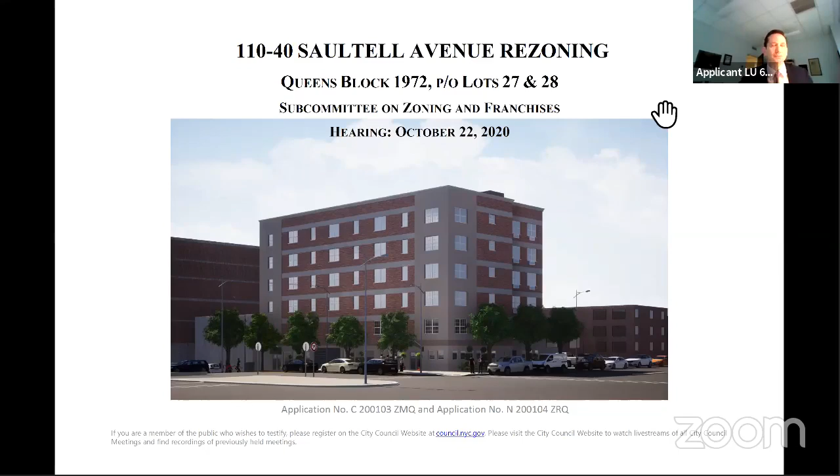So what are the goals of the rezoning? To summarize, the proposed actions are a zoning map amendment to rezone Queens Block 1972, parts of lot 27 and 28, as the proposed project area from an R6B to an R6 zoning district, and from an R6 and R6B zoning district to an extension of an existing R6 zoning district. This is much like many of the rezonings we've done of late, particularly in Queens - kind of a corrective rezoning, which we'll see on the map shortly.

There's also a text amendment to establish the proposed project area as a mandatory inclusionary housing area, with which the council is very familiar. Typically, in the application, options 1 and 2 are designated.

The proposed development would be a new 6-story plus cellar mixed-use community facility and residential building with a total floor area of approximately 30,848 square feet, an FAR of 3.63, and 26 dwelling units - 21 one-bedrooms and 5 two-bedrooms. Formerly, there was a component of studios to be built on the site. After further consultation with the council member and the community board, the studios were eliminated and larger one-bedrooms were created. We're really happy about that.

The development site is 110-40 Saultell Avenue, on the corner, as you'll see on the map in this location. There are 13 ground floor parking spaces provided, which satisfy zoning, and the applicant would anticipate compliance with option 1, which would provide 6 affordable housing units.

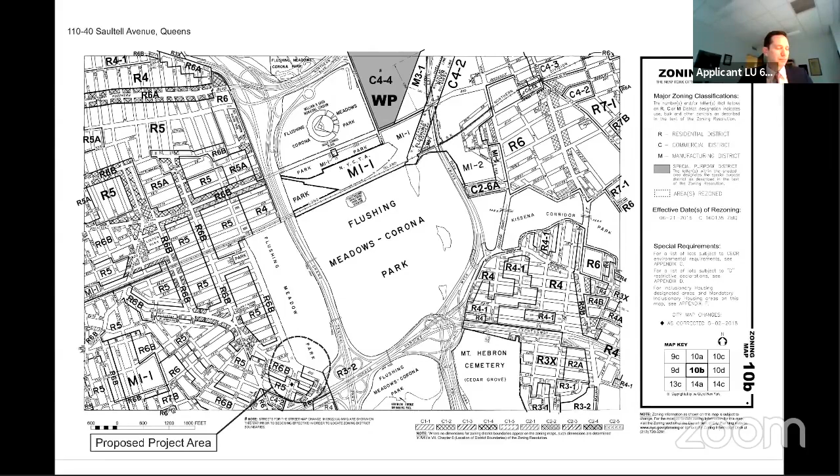An easier way to look at this is through the tax map. Here you can see in close-up the R6, which will now encompass that small rectangular portion of the block, changing from an R6B to an R6.

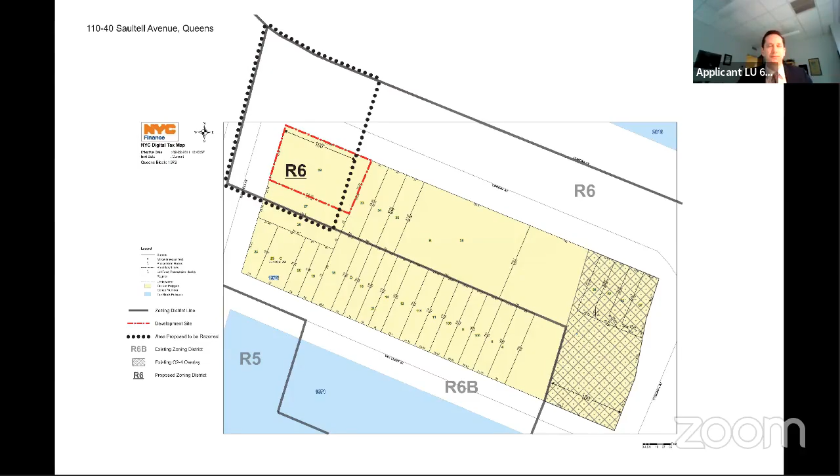From here you can see the layout of the local area - this is the land use map. There's the 6-story existing nursing care facility midway down Corona Avenue, and then the potential site here, on the corner, encompassing the two lots that are part of the proposed development. The opportunity for Rego Park to encounter a property like this and provide office space and services is invaluable for them. As discussed elsewhere in the application, this will free up space to, among other things, allow for a dialysis center to potentially be placed on the existing facility, making it easier for current patients and residents to use the facilities.

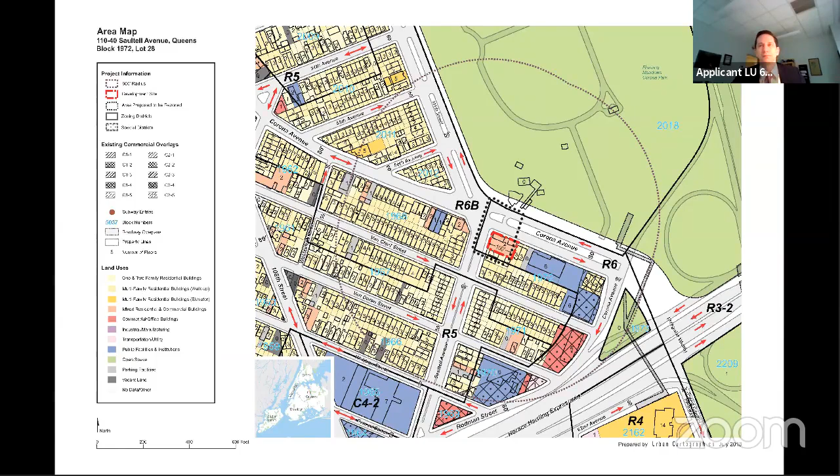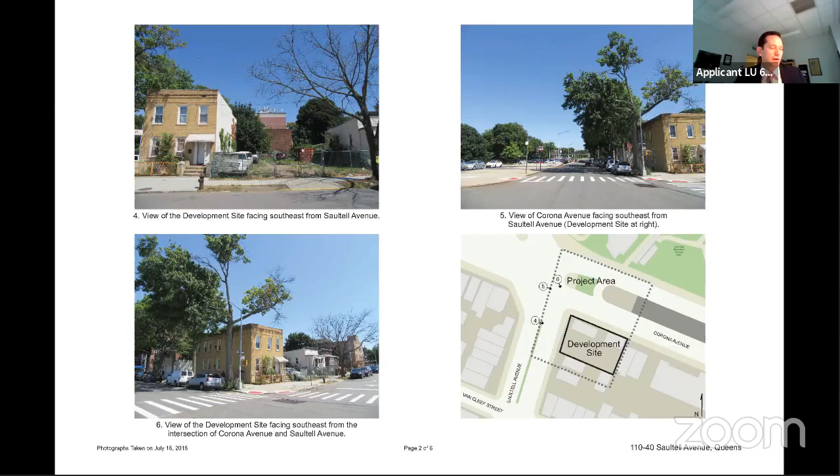Here we have some pictures of the development site taken from certain angles - you can see the key in the lower right. We provided one page of pictures so you can see Corona Avenue and the project area, and how it interacts with the surrounding area. That corner building, the development site, would be demolished, and the new building would go up, much like in the initial rendering. If you can page through the next slides, we'll start to go through the project plans.

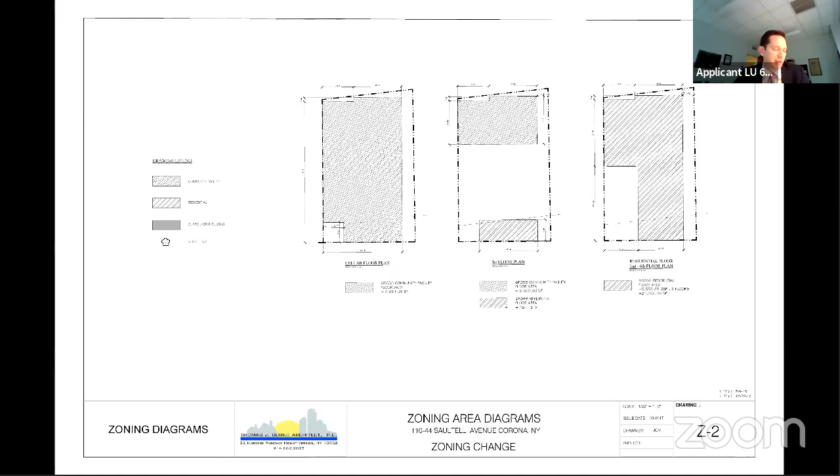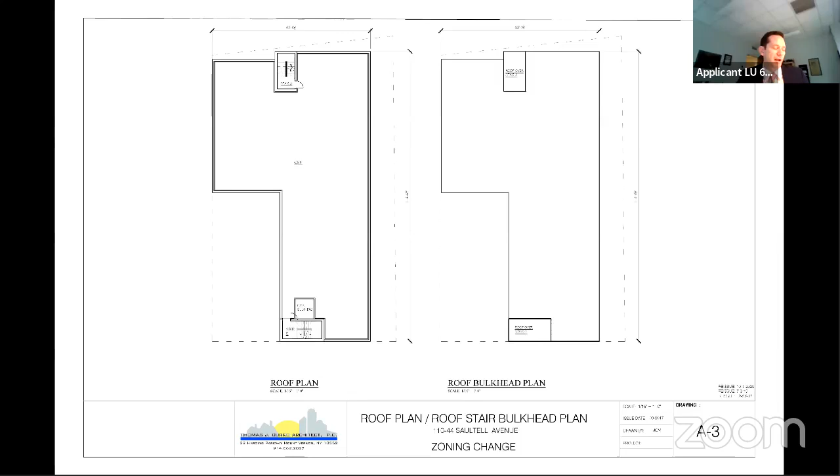Here you see the basic layout of the property, the cellar, first floor plans, and residential floor plans. The cellar floor plan would include roughly 6,600 square feet of community facility. The ground floor, as discussed, has 13 parking spaces, and the 2nd through 6th floors contain residential units varying between 1 and 2 bedrooms - 21 one-bedrooms and 5 two-bedrooms. Further, the ground floor maintains, in addition to parking, a residential lobby and access to the community facility cellar space.

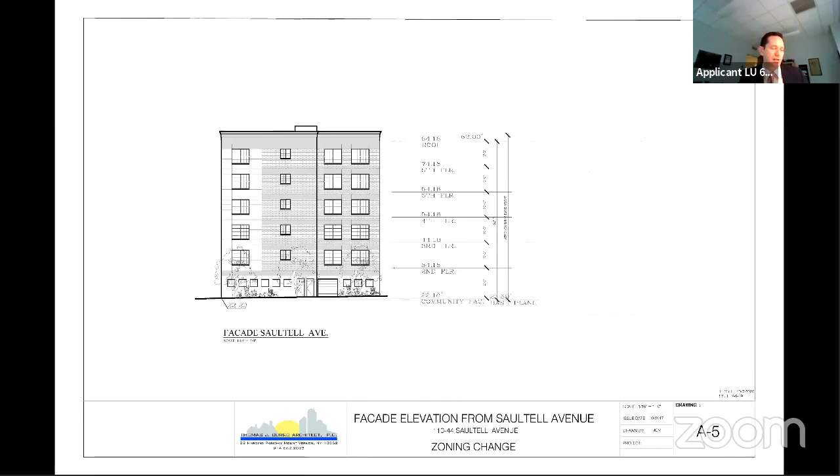So in basic rendering here, you can see essentially what the character of the building would be. It's going to look much like the existing facility and other local community facilities in and around this block. We've had conversations, as Councilmember Moya can attest to, with the council member in whose district this property lies, and we've had some very productive conversations with regards to use of the community facility space. On behalf of the entire applicant team, we'd like to thank Councilmember Moya for making himself available for many of these conversations. It's been a really iterative process.

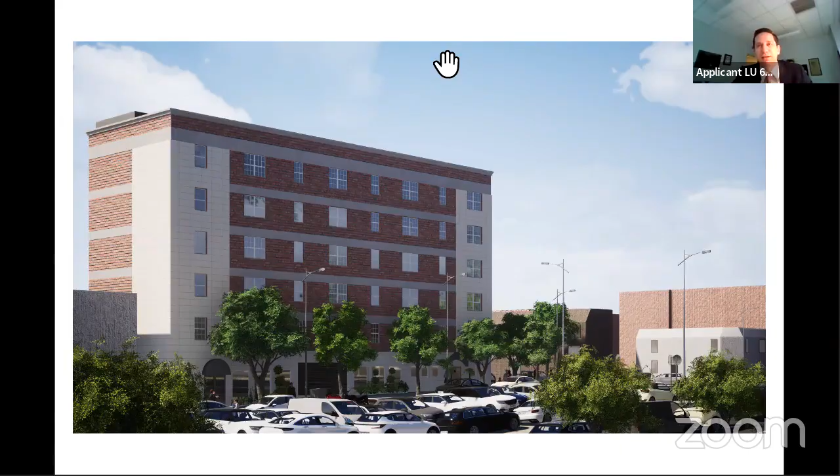Nelson can tell you that he's excited about the opportunity to really take what amounts to administrative space at the existing facility and allow that to sit in this new building, while at the same time being able to generate some housing and affordable housing, and importantly, some community facility space with potential users whom we've already talked to as recently as yesterday.

In conclusion, the entire applicant team is available to answer questions, and we value the opportunity to appear before the subcommittee.